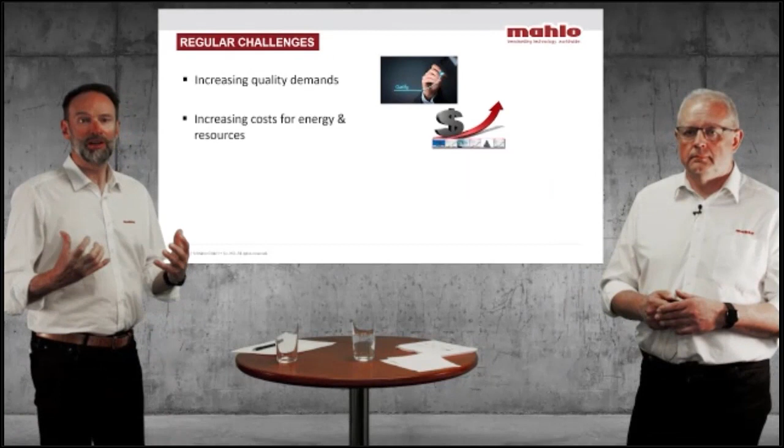Yeah, but no matter if we're talking about textiles or the other industries, we all have the same challenges, and this is the quality. Quality is rising, money is always going down. We have to make the best out of it. We really have to get the best efficiency out of it. Nothing goes for free, but we have to provide the best quality.

These are the challenges you are faced with every day, because at the moment, after these unthinkable happenings in Ukraine, for example, and the energy crisis which we all face, also for the future, we are sure that the prices for energy and resources will only know one way, and this is upwards. This is also creating inflation everywhere. In most countries, because of the energy prices, you have a high inflation rate. This means the salaries also have to go up in order to still be able to buy food and do the necessary things.

And at the same time, because there has to be a transition in the world's energy sector and so on, everybody is talking at the moment about sustainability, and this is especially for textile companies an important factor which comes up more and more. Everybody wants to be green, and very much so. It's not just that we see it everywhere. We are in the focus.

The textile industry is always in the focus of the media because of the pollution, because of the high energy consumption and so on. And this is also something that we have to focus on ourselves, because we can save a lot of money, but also because we do have a responsibility towards the next generation, and we have to take that seriously. And exactly this is what we want to discuss over the next 45 minutes to one hour with you. This is your path to sustainability, because we believe that there is no excuse to waste any money. No.

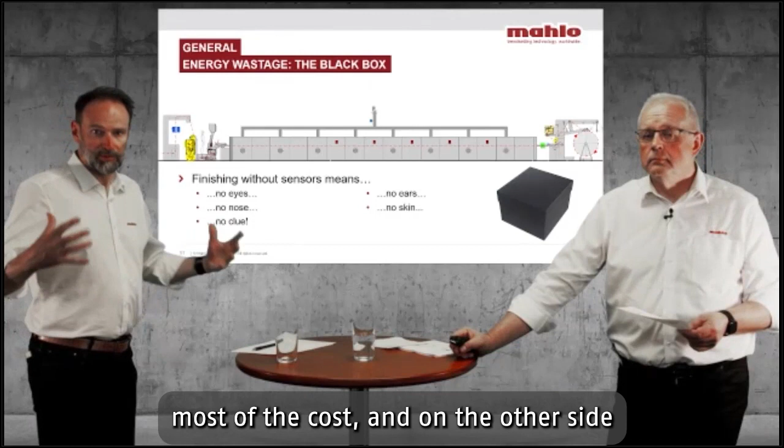And in general, we are focusing on the drying machines here, because those drying machines, first of all, are consuming most of the energy, most of the cost, and on the other side, they are also the bottleneck for the entire production. So they are very, very important for every wet finishing.

And without any sensors, you don't have any eyes, no nose, no sensors. It's like a black box, and we want to open that black box for you to look inside and to make those processes which are happening inside more efficient and more transparent to you.

Yeah, when we want to talk about energy savings, we first have to talk about what energy is, for example, going into such a stenter frame over the years. And we have made our calculation here based on 240 days. We have a woven fabric, 150 grams heavy, 1.6 meters wide, the squeezing effect 75% desired. The 75% is not very low. Yeah, exactly. So we believe that this can be run with 60 meters per minute.

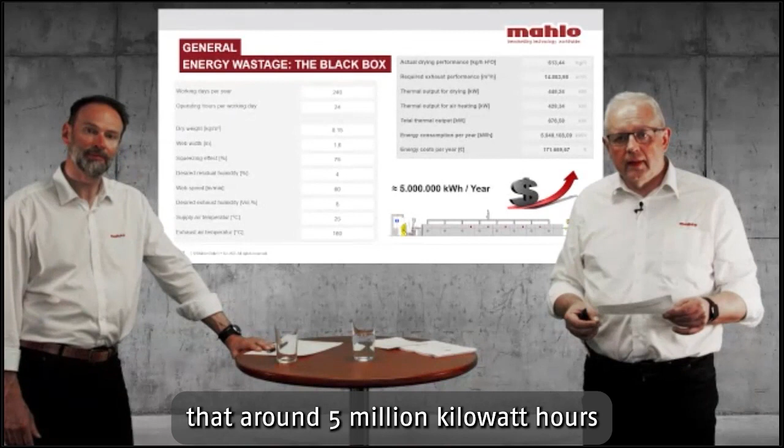Then when you calculate how much moisture is running into this dryer, you can easily calculate how much energy is necessary to evaporate all this water which this kind of fabric is bringing into the machine. And then we come to the conclusion that around 5 million kilowatt hours per year are used inside such a stenter. For sure, this will also depend on the product mix and how it is operated, but this is a value which you have per year.

We did indicate the kilowatt hours here because it is very difficult at the moment. The energy prices, we know they go up, but they are still very different, and we think you will have your own values and you can calculate by yourself how much money this is. Exactly. Those tables you can find on our website under ROI calculator, and then you can punch in your individual numbers and see how it works for you.

Okay, so if we just give you a number, in Germany at the moment we calculate with 9 cents per kilowatt hour for the industry. This will then come to 450,000 euros per year. If you calculate over the next 15-20 years with a certain inflation rate and cost increase, then you can imagine how much energy such a stenter frame is actually requiring through its lifetime. And accordingly, the savings that you can make by optimizing those things are really immense.

And yeah, if you want to save money, you don't just look at the energy. There's also the time, there's the energy, the electricity, and that, of course, all sums up in saving money. And this is called the Mahlo process control.

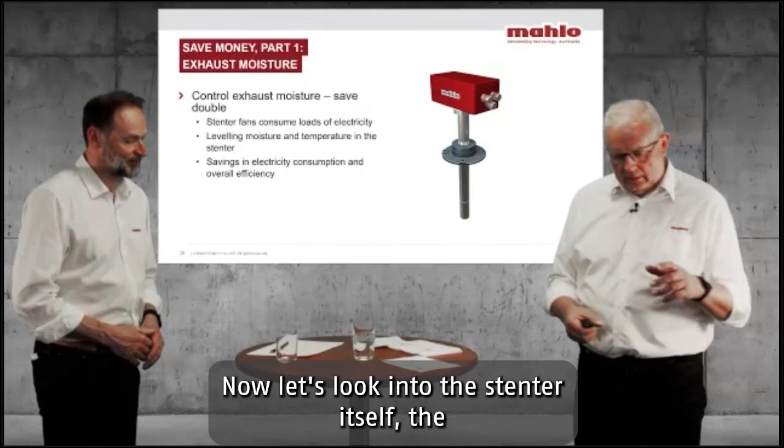Now let's look into the stenter itself. The best possibility to save energy in the first place is to check how much air is thrown out via the exhaust duct on the stenter frame.

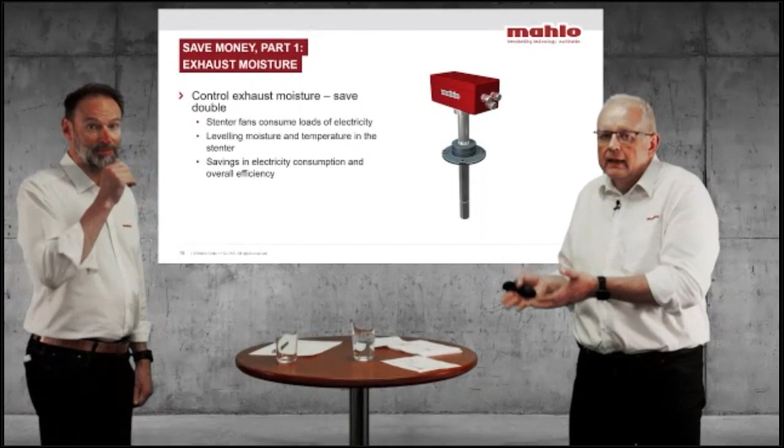Because inside the stenter frame you evaporate the water, it has to be removed. This is done via the exhaust fan and the exhaust duct. But very often, people throw dry air out of the dryer, which could still carry much more moisture without influencing the drying process. And this air is hot air, warm air, full of energy, and the energy is better used inside than outside of the stenter.

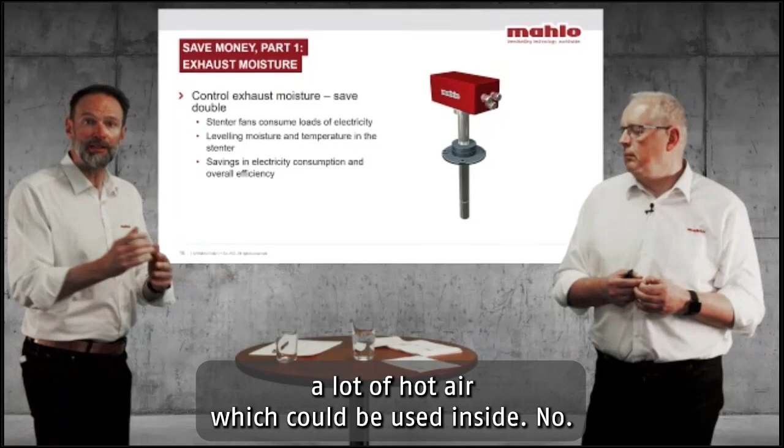And by putting that air out, you are not just losing a lot of hot air which could be used inside. You also use those fans, with 7.5 kilowatt motors, blowers, running on full throttle and really wasting your electricity, while they are putting that hot air outside that you would need inside. So you save twice if you optimize that process.

And therefore, we recommend to put the sensor measuring the exhaust humidity into the exhaust duct. This is our ZS12. It is a zirconium oxide based sensor with which we can measure how much moisture is in the exhaust air. When we know this, we can set a target value which is good for the drying process without influencing the drying process itself. And automatically, the system controls the speed of the exhaust fan, so that only the amount of air that is actually necessary is thrown out via the exhaust duct.

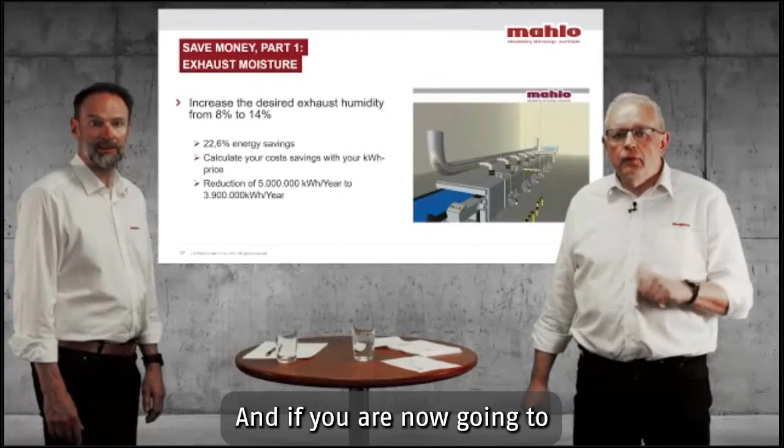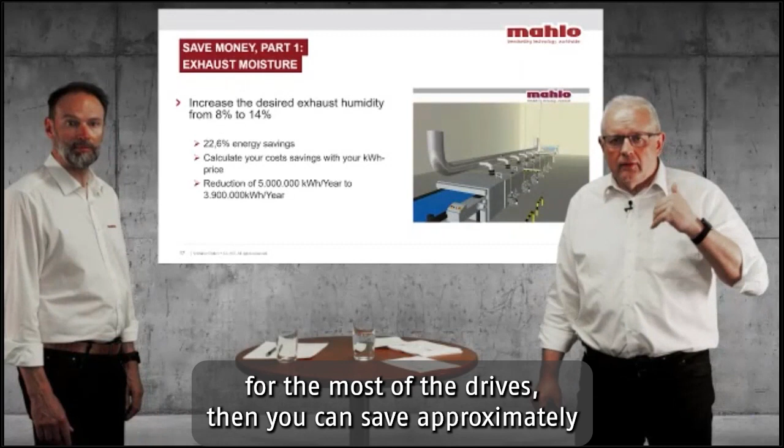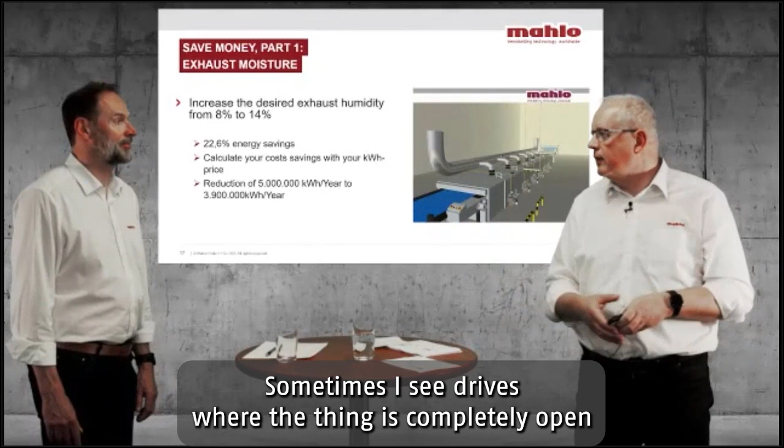And if you now increase, for example, the exhaust humidity from 8%, which means the air is nearly dry, to 14%, which is a regular good value for most dryers, then you can save approximately 22% of energy. Mm-hmm. And the 8%, this is still on the higher side. Sometimes I see dryers where the thing is completely open and all the energy is going out.

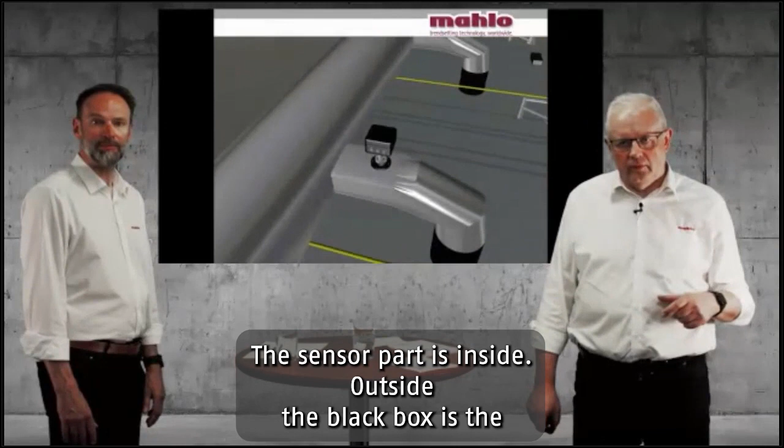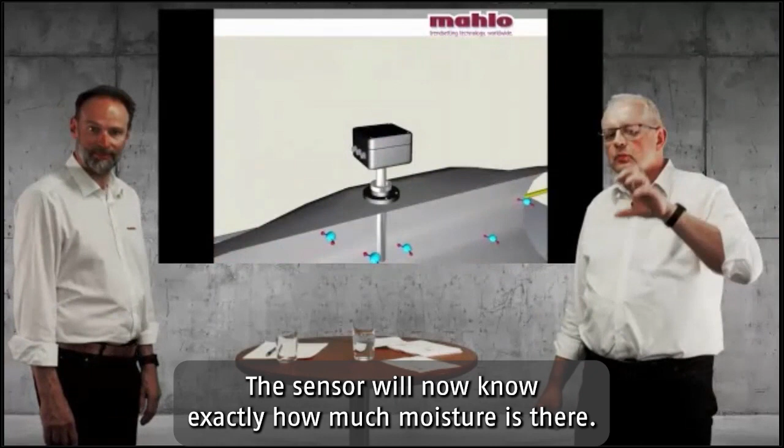But let's go and look inside the stenter and follow the path a little bit. So you see the sensor now. It's in the exhaust duct. The sensor part is inside; outside, the black box is the electronics. Here you can see the sensor again. And now, when it has finally stopped rotating, we can see the moisture going into the exhaust duct. It is passing by the sensor. The sensor will now know exactly how much moisture is there, and this will be indicated. And as I mentioned before, with this information, we control the exhaust fan.

Yeah. And if we take this example, you bring down the energy consumption on such a stenter frame from 5 million kilowatt hours to 3.9 million kilowatt hours, which means 22% of energy savings. If you multiply this with your energy cost, you have your savings. And the return on investment period is very, very low, so you get the investment back very soon if you invest in this little piece of equipment.

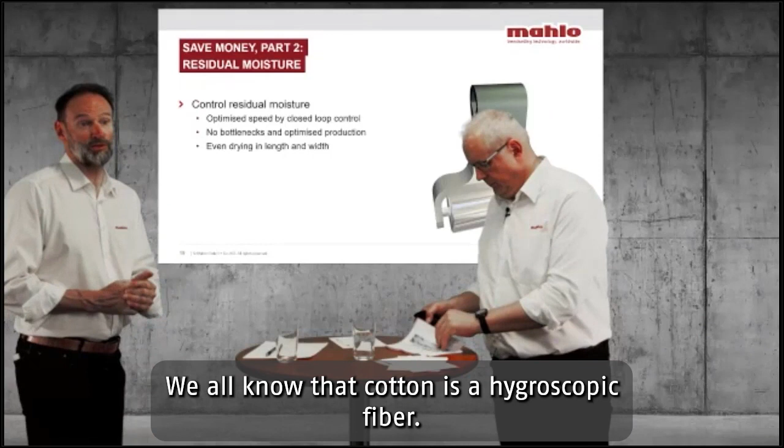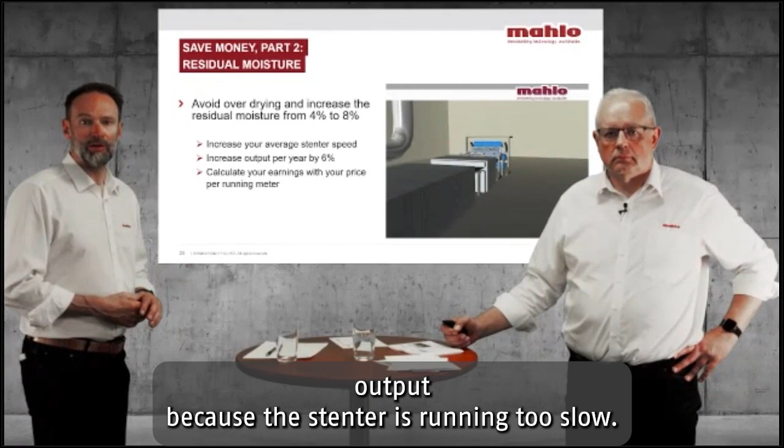Okay, something that everybody knows, I think this is also where Mr. Mahlo started, is the residual moisture. We all know that cotton is a hygroscopic fiber. Hygroscopic means that it pulls the moisture from the surface into the fiber, which means if you over dry a fabric, after a couple of hours you will have back moisture of more or less 8% in the cotton fiber. With that being said, over drying is not helping anything. It just wastes a lot of energy and ruins your overall output, because the stenter is running too slow, you're wasting too much energy, and the fabric gets back the moisture anyway.

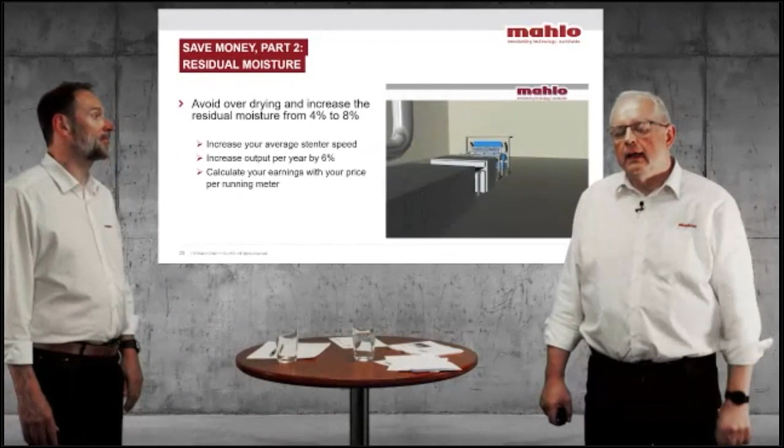So you have to avoid over drying to increase the speed of your stenter and get more production out of it. And by doing so, you are not only getting a higher production, you also have a much better absorbency and a better quality of the fabric at the end of the day. Yeah, and because you can get more output from the stenter frame, you reduce this bottleneck in your production, because you can run the stenter frame with the highest possible efficiency, and you have, like Stefan said, a very even moisture content at the outlet, which is good for the following processes.

Also here we have a short movie where you can see the electrodes where they are installed.

Most of you have seen this, because this is not only on stenters; you also find this on cylinder dryers, you find it on weaving preparation machines, wherever moisture content, residual moisture content, needs to be measured. This can help to optimize the process there.

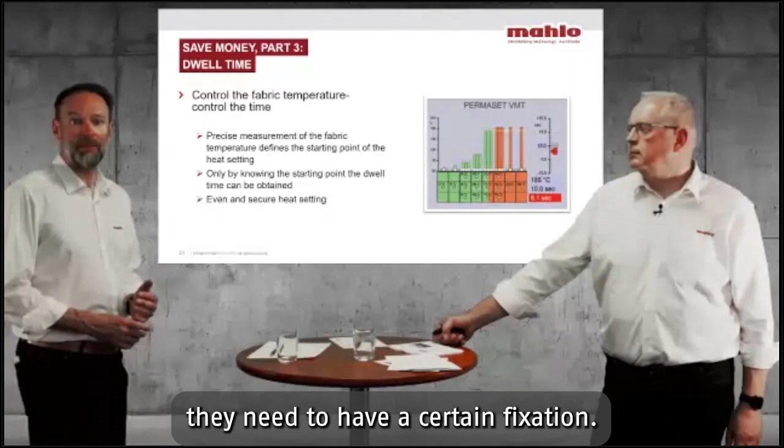Now let's come to part number 3, and this is the dwell time. If we talk about man-made fibers, of course, they need to have a certain fixation, and this fixation is a clearly defined time period at a clearly defined temperature level. And for having a certain time in the stenter, you absolutely have to know where it starts. Otherwise, you cannot say when it stops.

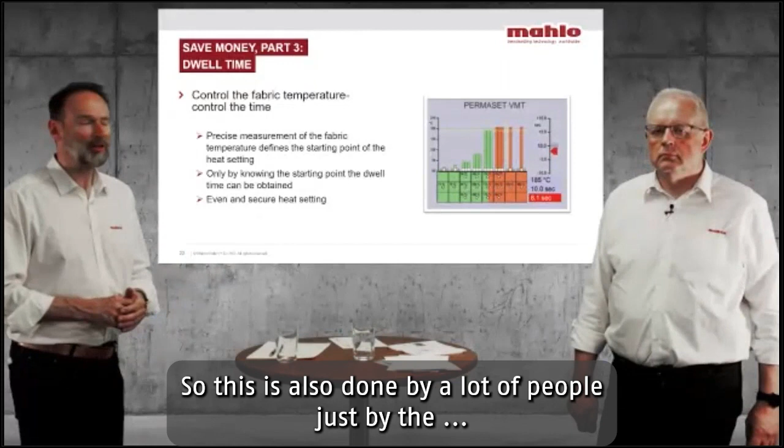So this is also done by a lot of people just because you do it all the time like this, you know. Exactly. Very often I go there, ask customers, and they tell me, well, we run this with 25 meters because we always run it with 25 meters.

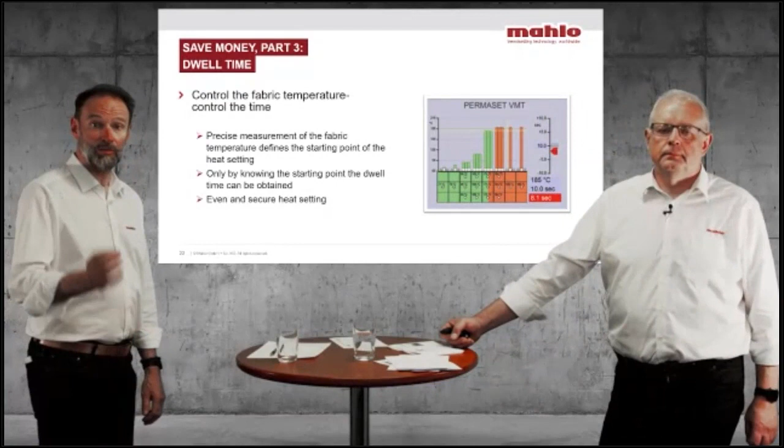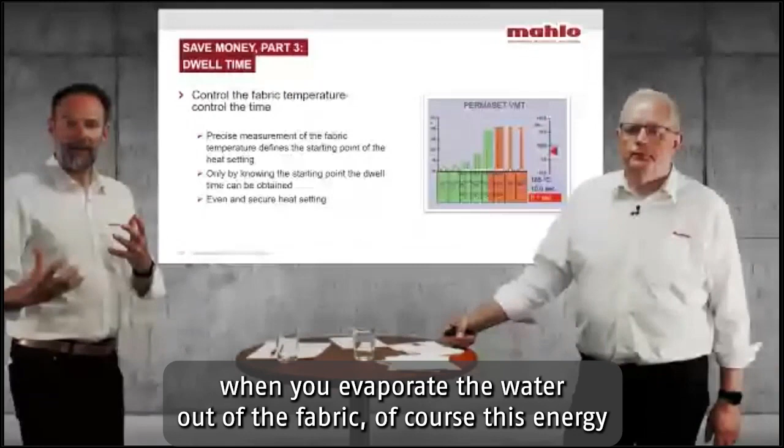And here we have a sensor which is measuring the temperature of the surface of the fabric. It is not measuring the temperature of the chamber. It is really going on the surface of the fabric, simply because at the beginning, when you evaporate the water out of the fabric, this energy is used to get out the moisture. It is not used to heat up the fabric. Only once that moisture is gone does the fabric start to heat up.

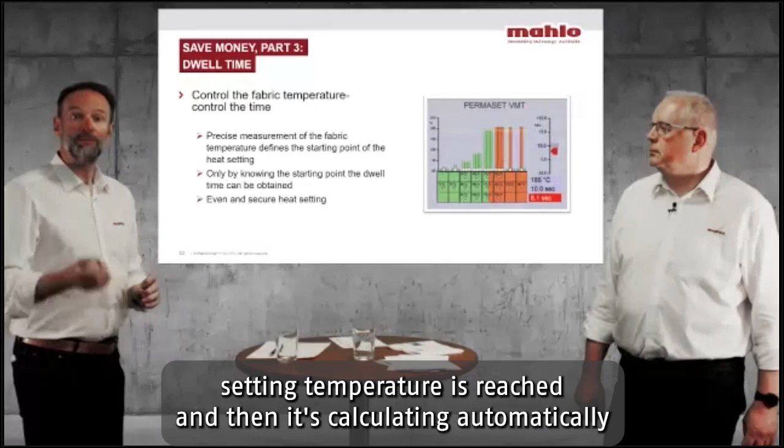This is how you see it there on the red columns. Those red columns indicate the point when the heat setting temperature is reached. And then it calculates automatically the time until the heat setting is finished. So you always have exactly the right speed for that process as well. And again, here you optimize the speed of your stenter, you optimize the production of your entire wet finishing.

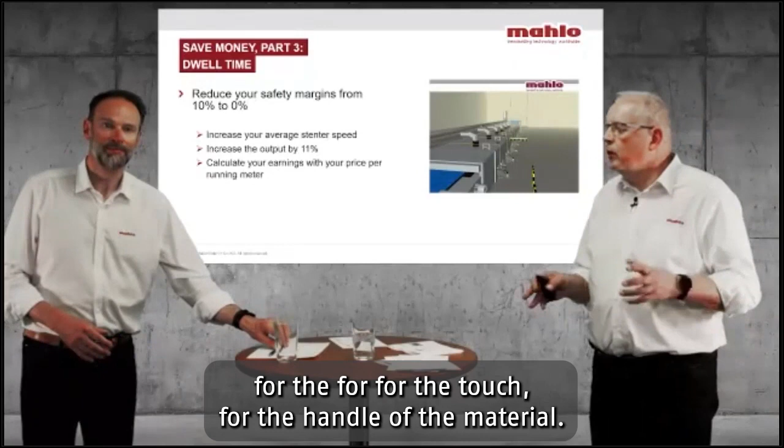And you just have to enter the desired dwell time, which you for sure will know, and off you go. Then the full control is done. With this, you can avoid any safety margins. A lot of people run their stenter frame with high safety margins. They do not run it as fast as would be possible because they want to be on the safe side. But being on the safe side sometimes is also not very good for the touch, for the handle of the material.

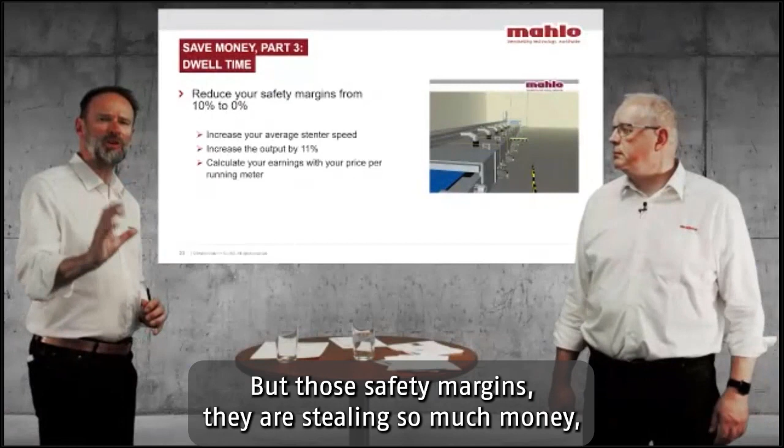Let me tell you something about safety margins in general. Those safety margins are the biggest enemy in your production, simply because they have such a friendly touch. You think, okay, I'm running a little bit too slow, so nobody's going to blame me. But those safety margins are stealing so much money without you even knowing it. It's perhaps instead of 60 meters, you run 55 meters a minute. Yes, but it's 10% less production out of the entire wet finishing.

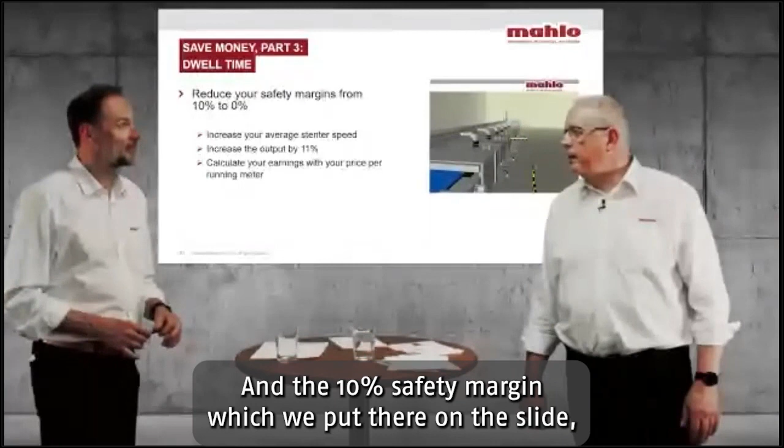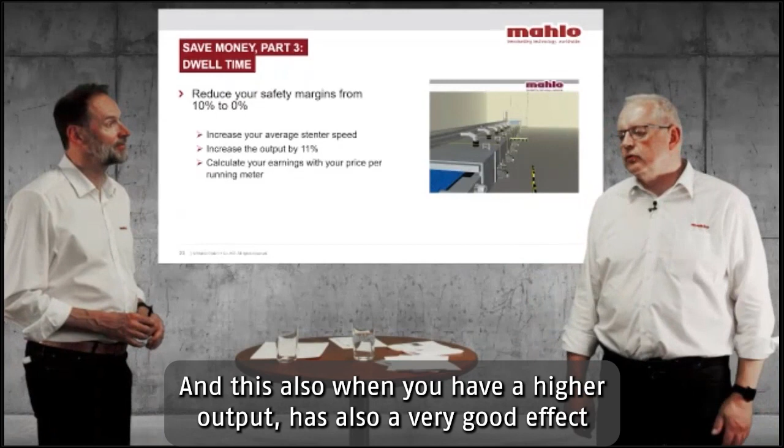And this, ladies and gentlemen, is a huge number. This is something that you really cannot leave unconsidered. And the 10% safety margin which we put on the slide is really on the low end. I have seen many cases where we could go up with the speeds by about 20–25%. This is possible, and then you get quite a good output. A higher output also has a very good effect on the energy cost per running meter.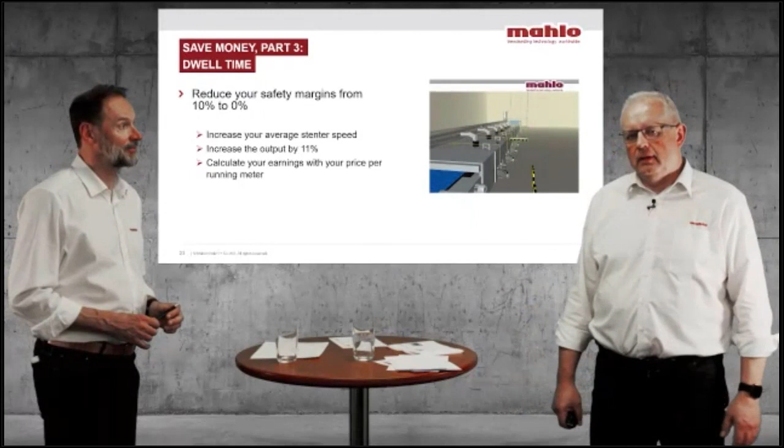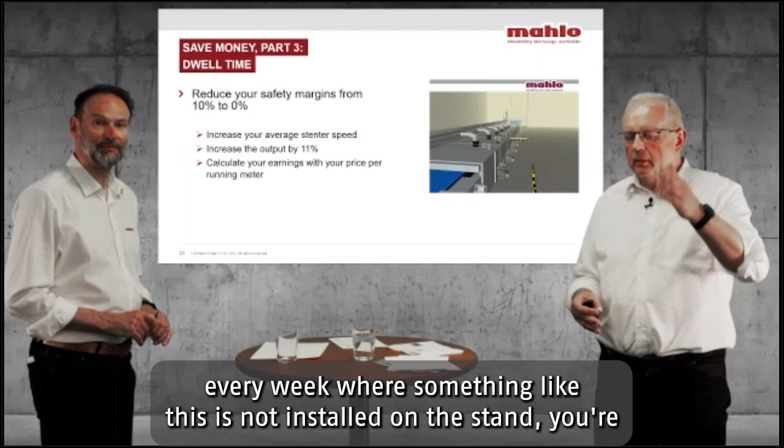In the end, as we said before, there is no excuse not to do this, wherever heat setting is going on. And sometimes I don't understand people when they say, let's wait, because there are some costs involved to install such a system, because in the end, every week where something like this is not installed on the stenter, you're losing money.

Yeah, that's now the next. Yeah, let's interrupt quickly.

I mean, we've talked about energy savings now for a long time. I would be very curious about the situation in your production. Do you have anybody who is responsible for the energy saving, something like an energy saving officer, an ESO in your company? Do you know something like that? So please give us a yes or give us a no.

Yeah, we just started this inquiry. So very simple question. Do you have such an energy saving officer, yes or no? Well, I think that we can already see the results. To my surprise, 56% of our participants say yes, there is such an energy officer in their company, and 44% says no. So what about you? Does this reflect also your experience, or are you surprised by these numbers?

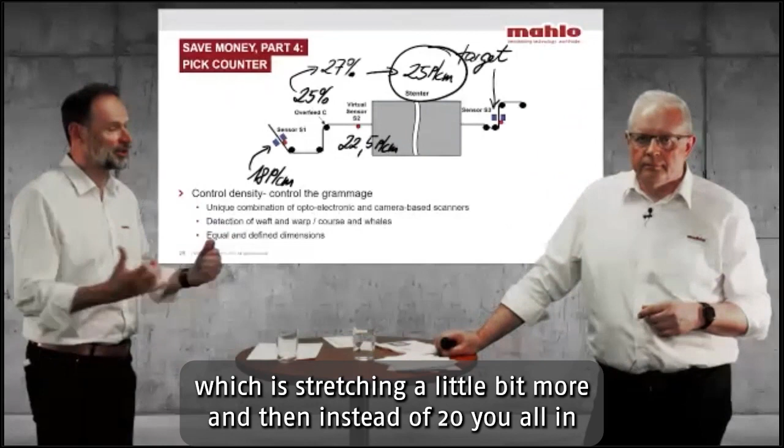And normally this is all running quite fine if we assume that the initial linear density is always staying the same. But exactly, this is what you mentioned before. It is not always the same. Sometimes we have an entanglement, sometimes we have a different machine which is stretching a little bit more, and then instead of 20, you all of a sudden have just 18.

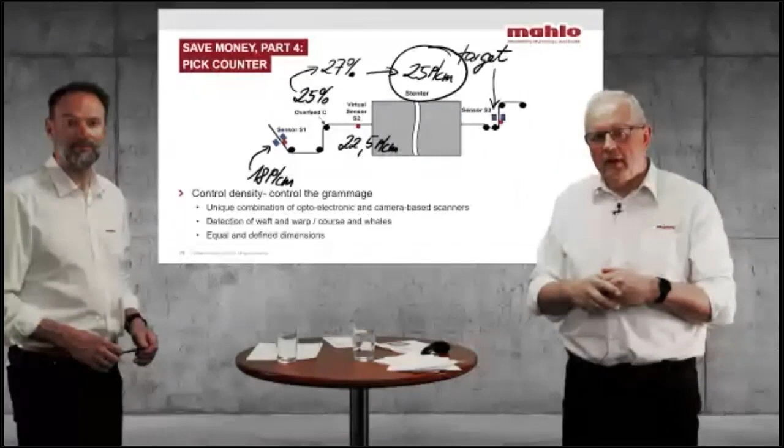When you now measure with our sensor at the entrance of the stenter frame, let's say you have 18 picks or courses per centimeter, and you run the stenter frame constantly with 25% overfeed, you can calculate yourself that you will not end up with 25 picks or courses per centimeter, what you want, but something different. And this is exactly then our task, because we will send out controls to the overfeeding system of the stenter frame and increase the overfeed to 27% until we have again this 25 courses per centimeter or picks per centimeter.

With this kind of control, this intelligent feed-forward control, we have the possibility already at the entrance of the stenter frame to ensure that what goes in is completely equal. So long story cut short, if you have a pick counter from Mahlo, you really have peace of mind that you always have the right density of your fabric, no matter what happened with it before.

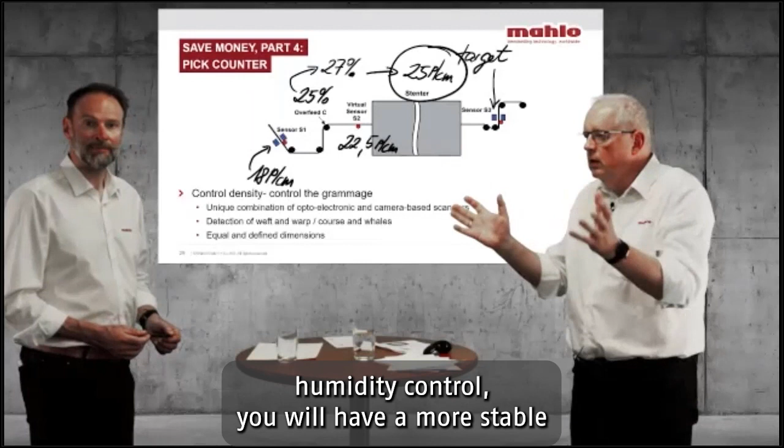And this helps inside the dryer again when you have a heat setting and material coming in with a constant density, constant weight. You will not have to do a lot of control up and down. The same for the residual moisture, it helps for that too. Even for the exhaust humidity control, you will have a more stable output and also drying process inside the stenter frame.

And therefore, we put this pick counter also in there because from our point of view it's very important, especially when we talk about sustainability and saving costs. We believe this is a big possibility, and I have to say, over the last 10 years we have sold more than 1,800 of those systems to the industry, and most of them were retrofitted.

But this is not the only advantage you have with such a tool. Density and weight go side by side, and we all know that knitted goods are sold by weight. So the weight plays a major role, and we now have the ability with our camera-based sensors at the exit to also get an indication about the weight directly after the stenter without putting samples to the lab.

Now I can only recommend all the companies today online who are active in the knitting industry to look into this matter, because this makes a difference. It really does. Okay, so coming to another one: cylinder dryer.

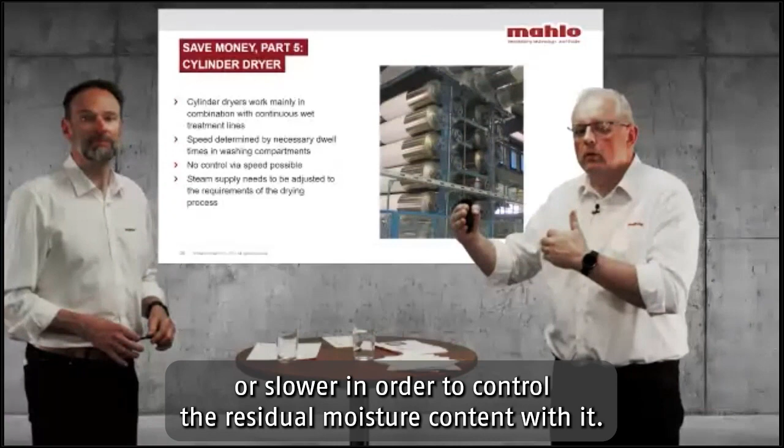So it's very important to know that those machines, unlike a stenter frame, cannot run faster or slower to control the residual moisture content. What you can do here, the only choice you have, is to control the input of steam into the cylinders of the dryer, in particular if you have a very light fabric running over the entire stacks. And this is what we do: we have the ability to switch on and switch off different stacks or even different cylinders to optimize the steam consumption for two reasons.

First of all, steam consumption, of course, is energy, it's money. But on the other side, and this is even more important, you need good absorbency afterwards, because if you have a fluctuation in the drying process, you have a difference in the absorbency. If you imagine you have an over-dried fabric at one stage with perhaps 2% or 4% residual moisture, and then again you have 8%, that is already a delta of 50%. Then at the next step, the next process, where you perhaps have chemicals added in a padder, a lot of chemicals are used at that step just because you had a problem with the cylinder dryer.

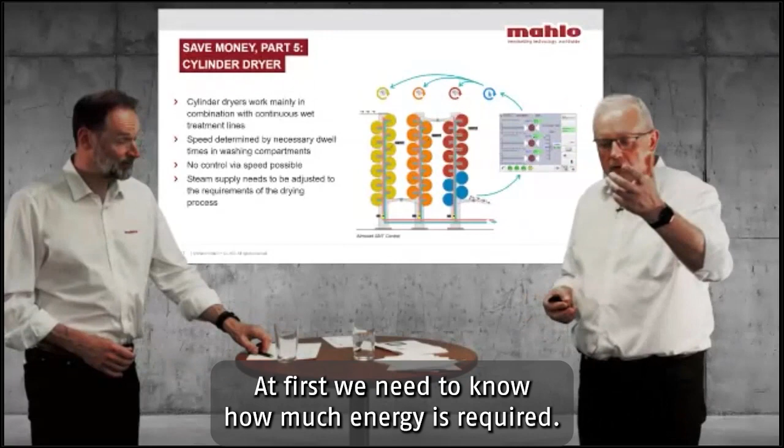And now a few words about our system. How does it control the steam supply into the individual cylinders? At first, we need to know how much energy is required. How can we get this information?

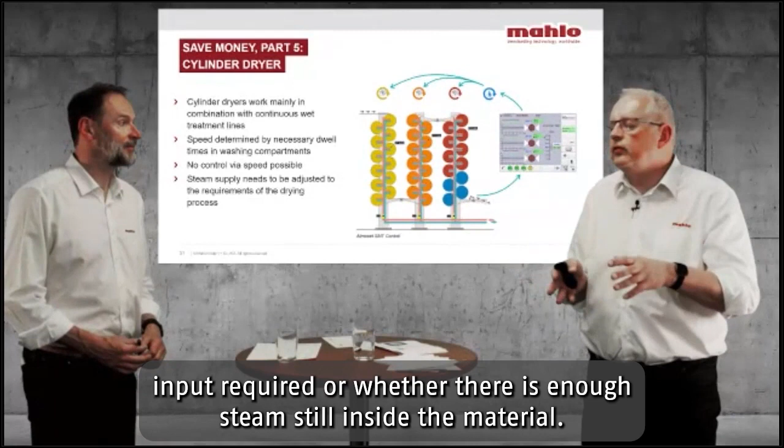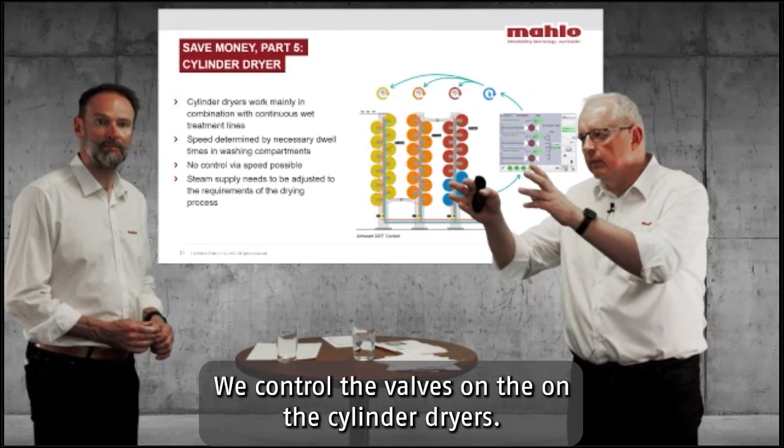We have decided for ourselves that we are measuring the temperature of the condensate at the outlet of the dryers, because with the condensate temperature, you know exactly whether there is steam input required or whether there is enough steam still inside the material. So if, for example, you're running a lighter weight fabric and a heavier weight fabric comes onto the first stack, immediately you will see that the condensate temperature will drop down. And this is then the moment where we control the valves on the cylinder dryers, and with this we keep the condensate temperature always stable.

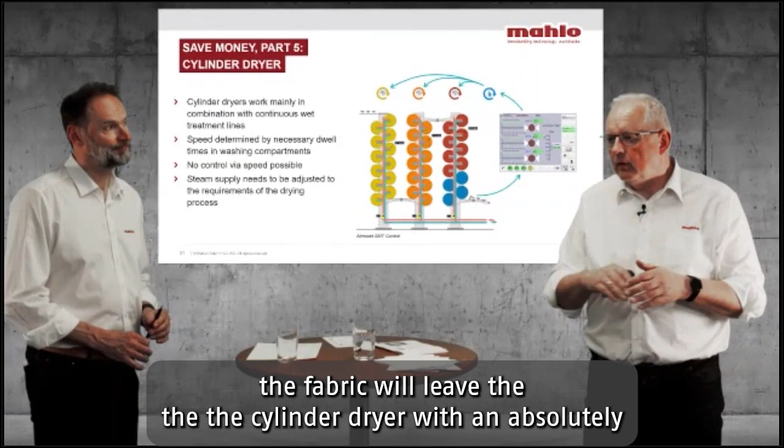At the end of the dryer, we additionally have a residual moisture sensor, and with this moisture sensor we will bring the absolute flat line to the right level. So whether we require now 6%, 8%, or 10%, depending on the fiber type and the process afterwards. But with this kind of system, we can ensure that at the end, the fabric will leave the cylinder dryer with an absolutely homogeneous moisture content in the length direction.

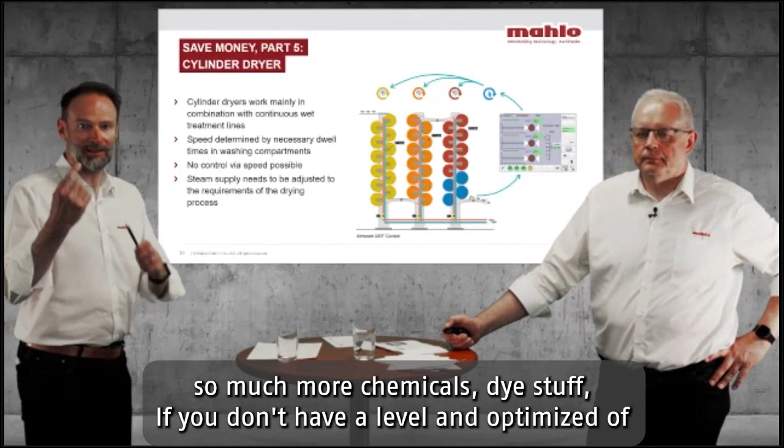So listing tailings in following dyeing processes will be much reduced, and this is also what a lot of our customers told us. Energy saving is very interesting for them, but on the other hand, also the improved quality within the following processes. Every padding which is coming afterwards is really consuming so much more chemicals, dye stuff, if you don't have a level and optimized residual moisture at the cylinder dryers, and this is costing much more money than the steam, because this is really highly concentrated chemicals, this is really dye stuff which is paying a lot of money, and therefore this process really has to be controlled, not simply because of the steam.

This is going, we are talking about 36% which can be saved here, but the following costs, they really count, and that also has to be looked after.

Here you have a few impressions how the systems look when they are installed. I don't think, because of time reasons, that we have to go through all this.

And here is a summary of what we in the end already mentioned. One important thing is there, we have this one value, up to 36% savings of steam input into the energy savings. And these are values which are not from us. These are values from our customers who had noted and stored the data about the steam input into the system before and after the installation.

For sure, there are others, it depends always a little bit on the product mix, how much you can save. But it was up to 36% on several qualities. And this is not values from us. They have a time calculation before Atmoset and after Atmoset, and the after Atmoset is normally 36% less steam than before. And the other points on this slide, I think we have mentioned already when we explained the system.

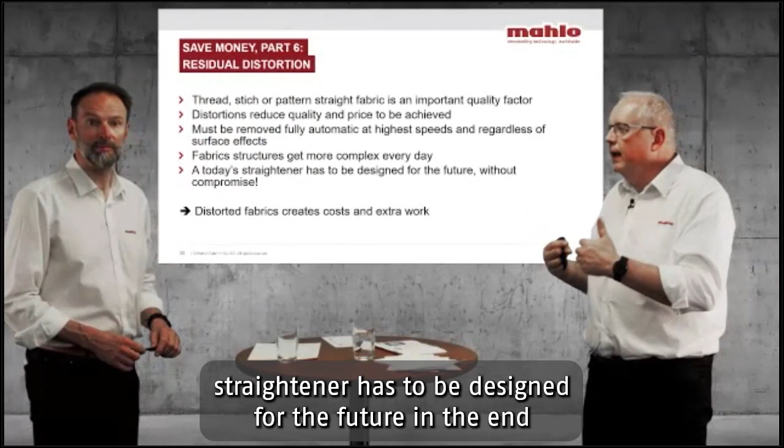Exactly. And also, when we talk about weft straightening machines, we believe that a weft straightener does not have to be designed only for the products you have at the moment, because we are in a fashion business, and therefore I believe a weft straightener has to be designed for the future in the end, so that you are safe on this. And because also in the future, you need to avoid these costs with reprocessing.

We talked with our customers and we said, what do they sometimes do? What are they doing when they have this kind of problem, when they realize there are some distortions?

Some of them, and this is the majority, say they will run it a second time through the stenter frame, because they have to dip it, wet it to get it corrected, and then go through the stenter frame again. It's a waste of money.

Another possibility would be to accept a lower price for a big portion of the material, say a B quality, or what we've mentioned as a total loss. This means you cut out the areas where you have these distortions, and in the end the costs come from all this reprocessing.

One of the big advantages of Mahlo is that we have a very wide range of different units, so we can adapt our model totally according to your needs. And this starts with the sensors. You tell us your product mix.

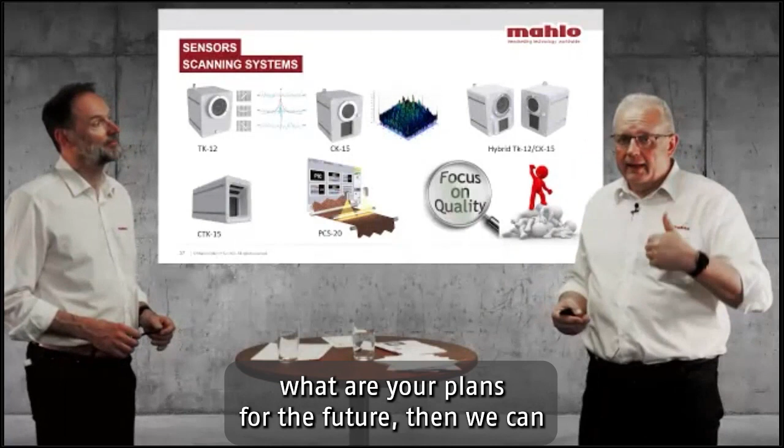This is something we always need to discuss with our clients. We need to understand what they want to do with such a machine. Once we understand this, and know what your product mix is and what your plans are for the future, we can use our quite big portfolio of different measurement principles to select exactly the ones which fit your needs. We do not have to do everything with a camera, or with an optoelectronic scanner. We have quite a wide range.

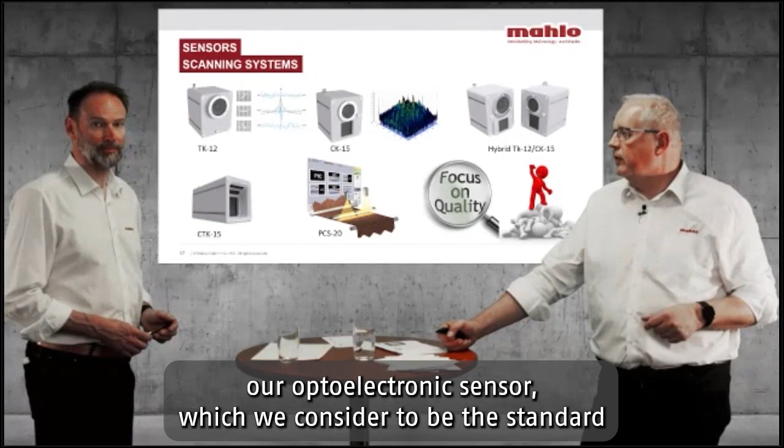What we see here, on the left side, is the TK12. This is our optoelectronic sensor, which we consider to be the standard in straightening for the majority of products. Then we have our CK15, a camera-based image scanner, available with reflected light, transmitted light, and infrared light for special qualities.

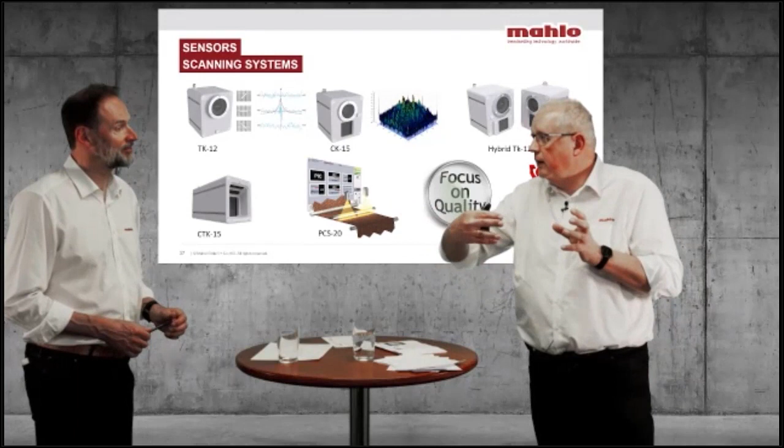Then the two sensors can form together a complete new system, which we call a hybrid system. With this, you can use one sensor to check the fabric from one side and the other sensor from the other side, giving you all possibilities.

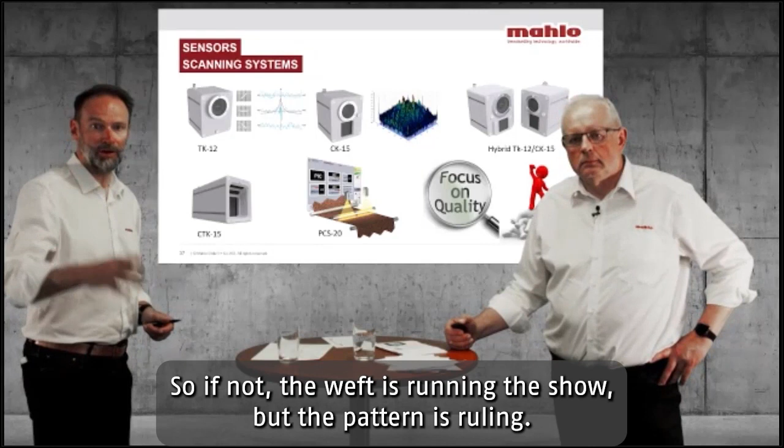Finally, we also have the line scanning for the pattern control system, where we scan the surface of the fabric like on a Xerox to detect the pattern. So if it's not the weft running the show, but the pattern is ruling, then this PCS line scan camera is the best solution.

A typical application would be lace fabric, where you don't have a weft or a course line going from one side to the other. You also use it in shoe production or for airbags in technical textiles. So there are a lot of different things that can be counted.

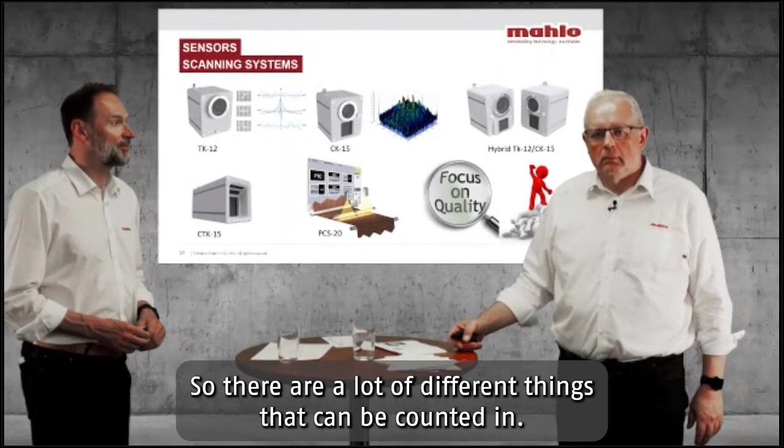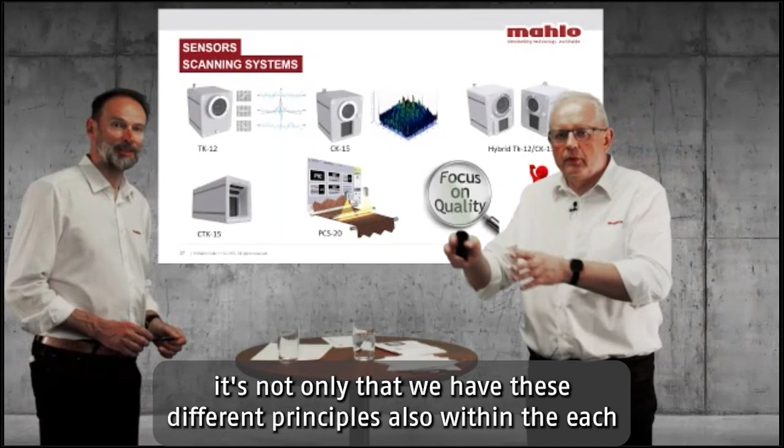We have one more sensor, the CTK15, used when we have very rough structures, like in the carpet industry with tufted or woven carpets, or at very slow speeds. This camera type is also very useful. As mentioned before, it's not only that we have different principles, but also within each principle we have different executions of our sensors, with which we can adapt directly to your needs.

Could we move a little faster, because I think there are still a lot of different things ahead of us. Now this we can maybe skip.

What is also quite important is to understand that we have a very unfriendly situation at the dye houses. There's a lot of dust, a lot of dirt, a lot of fluff. It's a hostile environment, and therefore any traversing movement of the sensors doesn't really play into the cards of production.

How is it looking in your production? Can you tell us about the situation? We don't collect the names, but if you could just give us an indication whether it's more like a hospital, a little bit dirty, or really toxic. Just give us your vote right now.

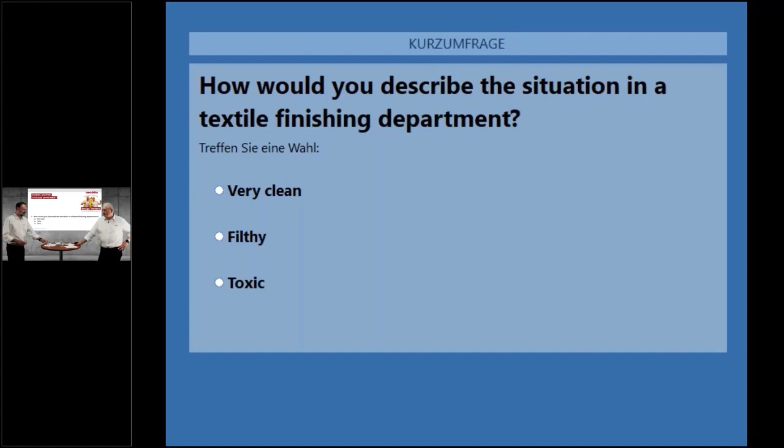I can see the results. So 25% of participants describe the situation in the finishing department as very clean. 67% say it's filthy, and only 8% say it's toxic. So what about your experience?

Good, but that shows we really have to take all possible precautions to make sure a sensor doesn't get stuck somewhere and stop giving information. The Mahlo system always has at least 4 sensors sitting side by side, up to 8 sensors, constantly scanning every single point of the fabric, and even if one sensor isn't working, the others compensate for that. So we have a very safe operation here, and this is important because the sensor is the eyes.

Without the eyes, we could not see, and without seeing, we cannot control. And this is why we don't take any chance here by any moving part. We just make sure that we get the required information absolutely sure.

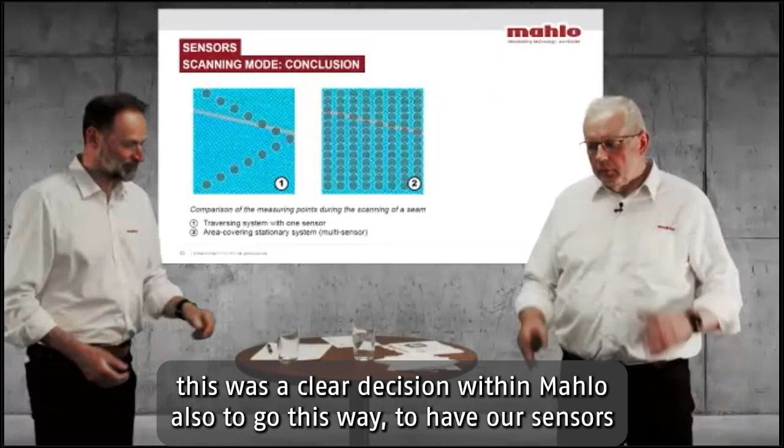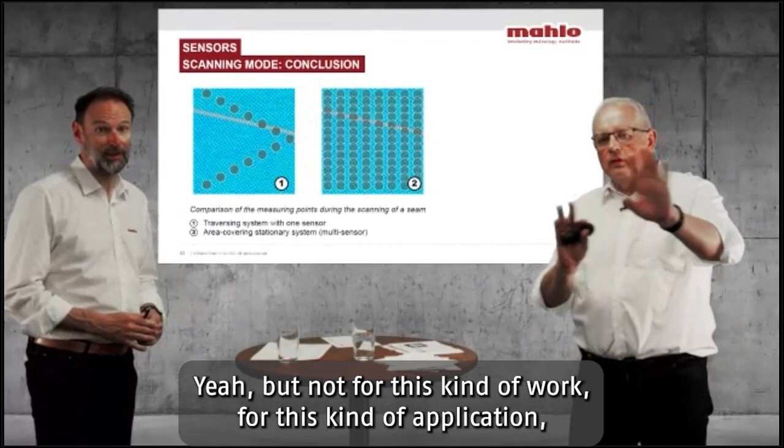Okay, yes, and this was a clear decision within Mahlo also to go this way, to have our sensors at different positions in cross direction, because then every millisecond we get new values. This is constantly renewed. We could let the one sensor travel, but not for this kind of application. For this kind of application, a fixed, multiple scanning system is much better, because you have this instantly, immediately there.

If you would have one sensor and it's traversing in cross direction, as you can see on the left side, it takes too long before you actually can react. If there is a bad sewing coming through, you have even more difficulty to get this whole thing sorted. Therefore, it was a clear decision from Mahlo to go this way, because it's simply the best.

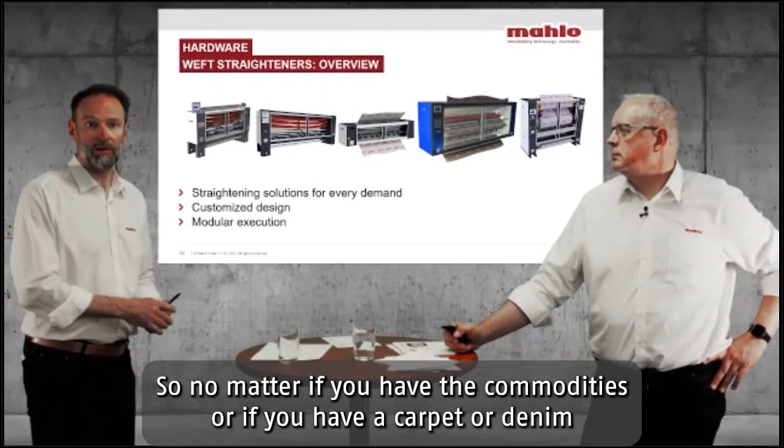Okay, let's go to the hardware. Same situation as we have it with the sensors, we also have it with the machines. We have something for everybody. So no matter if you have commodities, or carpet or denim, or lightweight fabrics, or even some things that cannot be detected, we still can straighten it. We can straighten doglegs, we can straighten S distortions. So you tell us what your problem is, and we provide the solution.

Since we do not have so much time, we will not introduce each of those machines now. We will have them on our booth at the ITMA in Milan. So please come by, talk with us about your application, and then we can recommend whatever is possible.

But one thing, because this is a really completely new development at Mahlo, I want to highlight now, because we consider this the absolute Champions League of weft straightening. It is a specialist for knitted fabrics, for knits, and you are the first to see it. Actually, this is the first time that we put it in public. It will be on display at the ITMA for the first time ever.

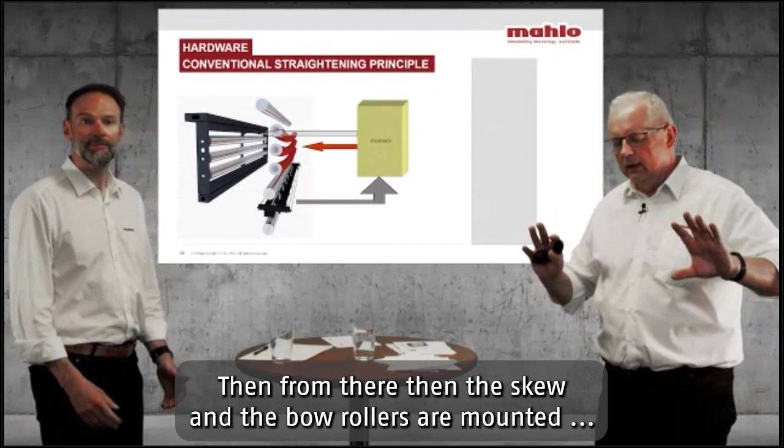This is a combination of different straightening principles, making sure that really every single millimeter comes out totally straight. With the normal weft straightener, which I hope most of you have seen, especially the Mahlo system, we always have the scanning system at the exit end. It detects the distortion there and gives it to our electronics, and from there the skew and bow rollers are moved to certain positions in order to shorten and lengthen the fabric path to correct the value.

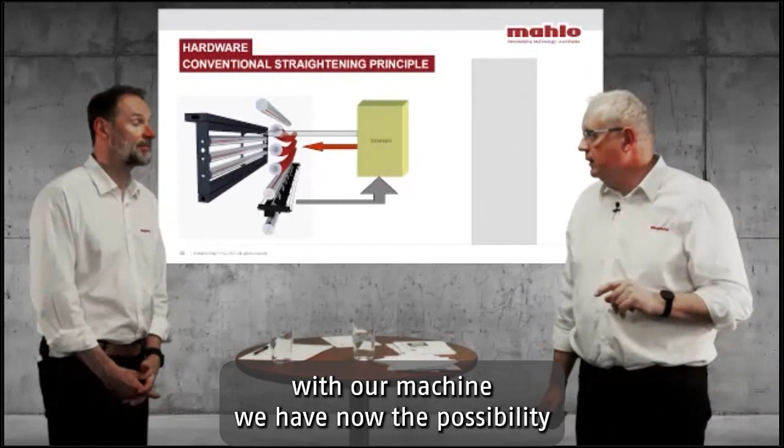But you need to have it at the end because you need a control loop. You cannot just put it on top of the machine, and therefore you always need it at the end. But with our new machine, what we call the Orthopac RXVMC, we now have the possibility to have two parts. We have one straightener.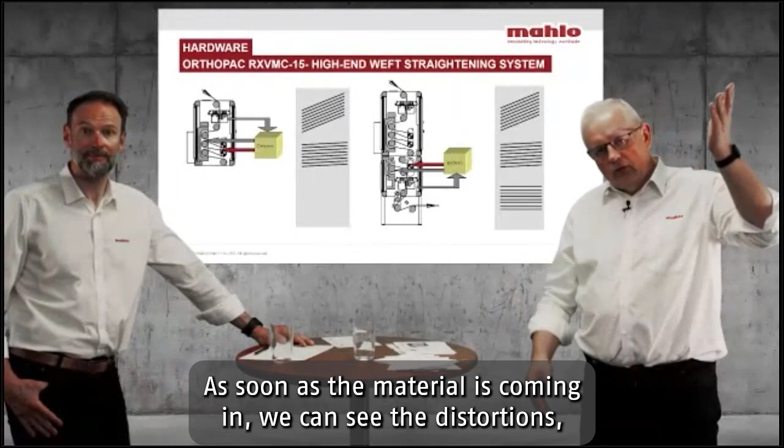On the left side, you can see it. It has the detection system at the entrance. As soon as the material is coming in, we can see the distortions, and based on the distortion we see, we can immediately start from the first centimeter of the fabric arriving, or of the new distortion. We can move the skew rollers and react on this. For sure, this is not a controlled loop.

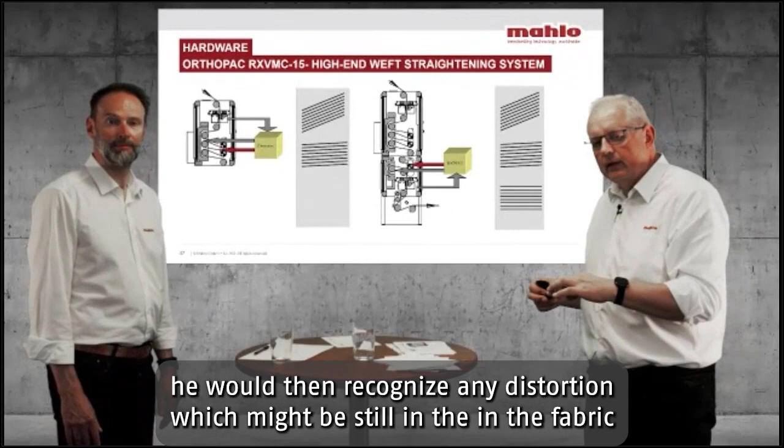Therefore, on the other side we have a second part of the weft straightener, and there you can see there is also a skew and a bow roller and a detection system at the end. This fine-tuning straightener afterwards will recognize any distortion which might still be in the fabric and give a signal via the electronic systems to the skew and bow roller, and then you can be sure that the fabric is completely straightened right from the beginning. It's actually two weft straighteners in one.

For sure, also this machine is equipped with our hydraulic system to move the skew and the bow rollers to the right positions. This is a very excellent system, and it's working in a linear system because the piston is moving the skew rollers directly there. The momentum is unmatched. There is no way that any other system can create that momentum as a hydraulic system. You use hydraulic systems also with the caterpillars or with cranes or with the heavy duty operations, and this is why this momentum here is really without any competition.

We also let our customer then the choice for an electric system, but also there we have optimized the whole kinematic of this drive so that the characteristics of our electric drive system is very close to a hydraulic. It's not as good as the hydraulic, but it's close. It's much better than if you have just toothed bars, because then you always have some play involved. Here, with our system, there is no play involved. And a weft straightener has constantly to move forward, backwards, has to do a constant job.

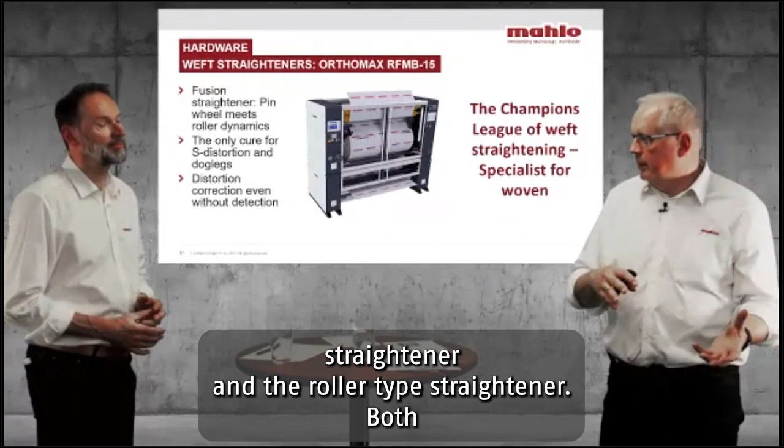Okay, and now we have here another system, and this is what we call our champion for the woven fabric. This is, in the end, as you can see here, a fusion of a pinwheel straightener with a roller type straightener. Both principles of correcting distortions, pinwheel and roller type, have certain disadvantages, but if you bring them together, they only have advantages, and this is what we have done on this machine.

Also, because of time restrictions, we cannot explain everything which is now included, but we have this machine on the booth. We can show you this. You can see it in running condition. So please come by, and I think we then will be able to convince you. We are here as well.

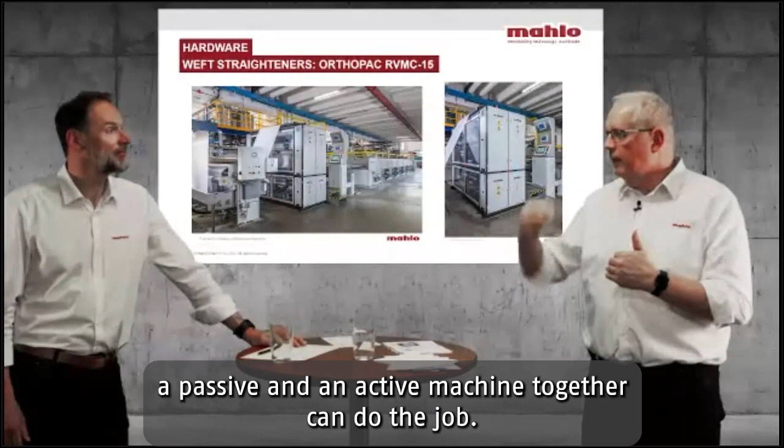Okay, here you can see some installations. It's a quite huge machine, I have to say, for a weft straightener, but it's also creating results, especially on woven fabrics where you have irregular distortions, where all the roller type straighteners have their issues, or if you have just at the edges some distortions. This machine, with the pinwheel and the roller type straightener, a passive and an active machine together, can still do the job.

Okay. When we talk about machines, we also have to talk about operating them, because a machine is only as good as the operator which is standing at the machine. And our operating concepts, they are very intuitive. We have spoken to a lot of operators, and we have shared their knowledge and the experience in our applications, and therefore they normally like to work with our machines. They see exactly what is happening, what's going on. They know exactly which button to press, and therefore it's really fun to work with them.

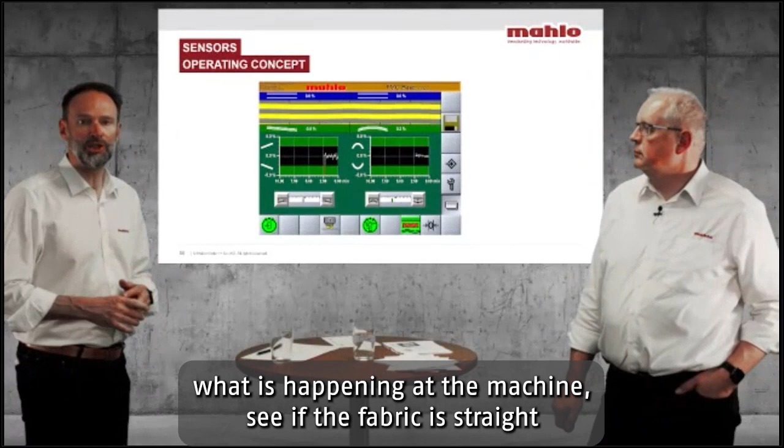And for the shift managers and the production managers, they can see already from very far what is happening at that machine. You can see if the fabric is straight and if it's running in manual or in automatic mode. So all the information is visible at a glance, which is also giving you a lot of advantages if you just pass by, because when an operator knows that he can be watched every time, he will do everything right, and he will not wait until somebody is correcting him.

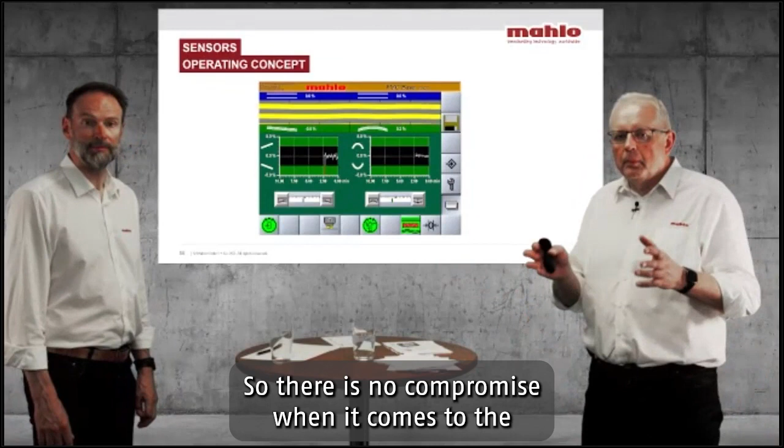Yeah, and we have different levels of software. They differ mainly in the level of comfort of operating the system. So there is no compromise when it comes to the evaluation of the signals and the control itself, but you have different possibilities how you can work and interact with the machine.

You get a little bit more information. You have some help how to set up the machine and such things. And on top, when we now combine weft straightener with process control, we also have a version where you can see everything on one screen. It's no longer necessary to jump from one page to the other page. You can see all the important parameters during a stentering process on one screen, and it's a normal screen in the cockpit, and there you have all the data available.

Talking about data management, these days Internet of Things and Industry 4.0 are very, very important, just to play with the data, to make it available, to create some transparency, optimizing processes, sharing data with other entities, perhaps also managing your dye house and your operation from another point, from a home office or wherever else.

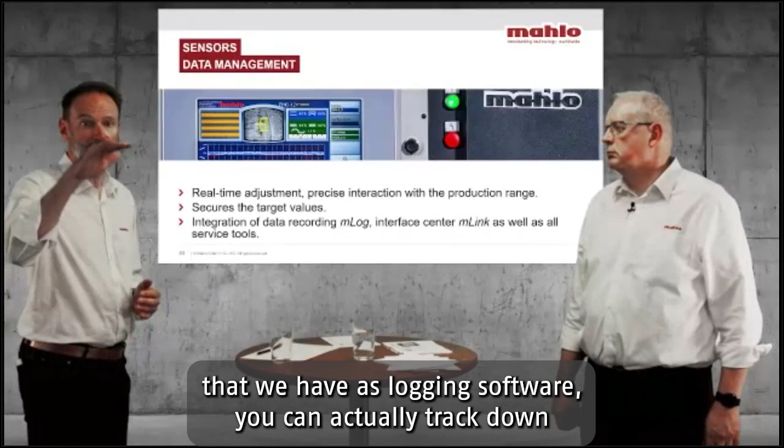And those are things that we support in every aspect with the right interfaces and adjustments and with the mLog system that we have as a logging software, where you can actually track down every centimeter of your fabric and see what has happened with it during the night shift, during the weekend. So you really have full transparency of what has happened, and you can share it with everybody who's interested. So if somebody blames you that you haven't reached the right values, you can show him exactly what has happened. So you have an insurance for everything that might happen in your production.

And as far as the interface is concerned, we have Profibus, Modbus TCP, OPC UA, everything. Just talk to us and we'll find out very soon. All the regular interfaces are there, so you just tell us what you require, and then we can provide the data externally.

What Stefan already emphasized is we are using the measured data for the online control, like what we showed before, but also we give you historical data in the form of protocols. We have developed a completely new software which is like a search engine, so the data are stored, and with this system you have the possibility to create your own protocol, however it is required from your side. You can say, I want to see the data from the full shift, I want to see the data delivered from one customer within a specific week. You can do whatever you like because all the data is available. And it's got a very nice look and feel.

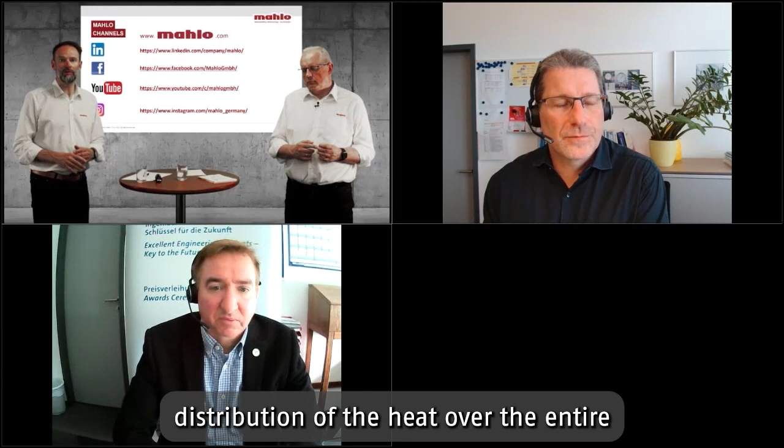Yep, this is absolutely a valid question, and it's my fault that I haven't mentioned it earlier. Of course, this is vital to see whether the drying process is really taking place over the entire width. If we are talking about 3.2 meters, the distribution of heat over the entire width is not always regular, and with that we can check it. You get a very good indication of what is happening inside your stenter, and you will realize there might be a problem before you have a fabric which is destroyed.

Yes, and the same applies to the residual moisture control. We not only have the possibility to measure the lowest moisture content, we can also indicate left, center, and right moisture content, which is sometimes important for a subsequent padding process and such things. Yeah, we have a cold pad system. Exactly. Okay.

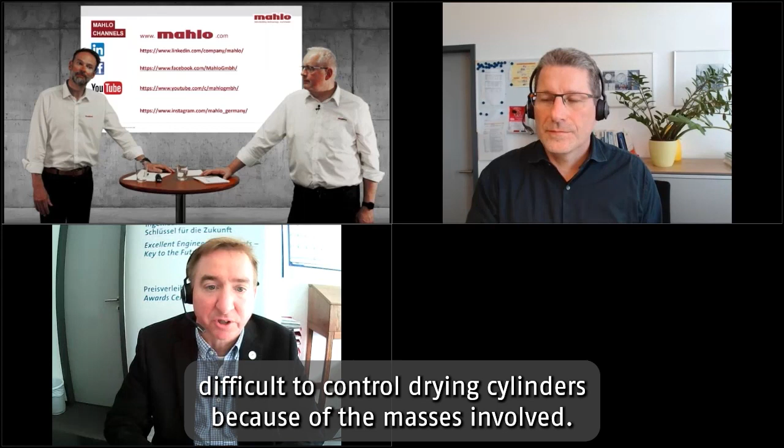Another question, this person seems to have some doubts: it seems difficult to control drying cylinders because of the masses involved. It is much more difficult than in a stenter. Does it really work? It works perfectly. I can only say we can give you reference installations, but there is one thing I have to mention.

You cannot have only one valve at the end which you control with the residual moisture sensor. You need to do what I tried to explain with the condensate temperature, and you have not only one control loop. You need to separate your cylinder dryer into individual stacks with individual proportional or on-off valves. This is necessary, and then it works perfectly.

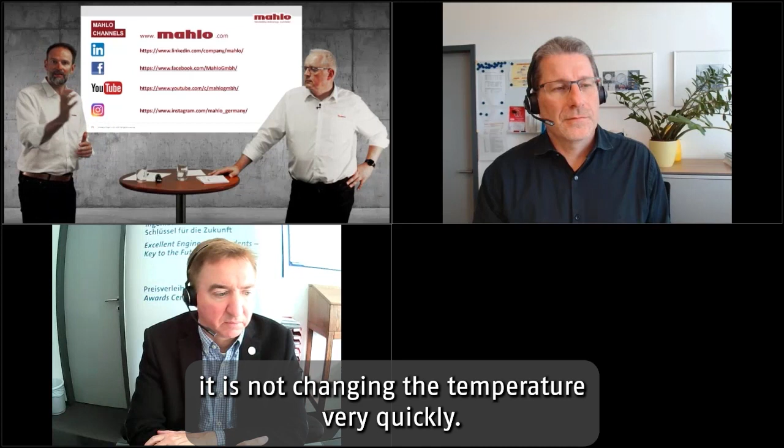As I said, we have many customers, and especially with the Atmoset SMT, we have a lot of customers who bought one, who bought two systems, and afterwards they have 10 and more systems installed. I can fully understand why somebody thinks that might be a problem with these cylinder dryers, simply because the steel or the stainless steel of those cylinders is not changing the temperature very quickly, and this is why we have taken the surplus of the condensate, because the temperature of the water can be measured, and this is an indication, and this is actually the reason why our system works.

It is because it's a Mahlo, of course, but also because we have taken that water, which is fluctuating much easier in terms of temperature than the steel frame of those cylinders. So don't be misguided by that huge installation of cylinders which are not quickly changing the temperature. We are not measuring the temperature of the cylinders, we are measuring the temperature of the condensate, of the water. And this is the reason why it's working that easily and why we can control it.

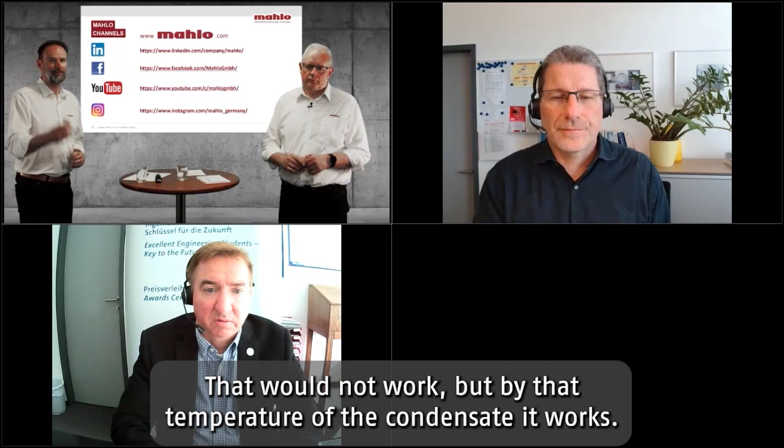We wouldn't be able to control the temperature of the cylinder or of the chrome or the stainless steel or the steel. That would not work. But by the temperature of the condensate pots, this is why it is actually all of a sudden making a very, very good system. Yes.

Okay, another question. Can you also recommend the pick density counter for an open width compactor in felt type? Basically, we have also quite a number of installations there, because in the end, it's the same inlet scenario like on the stenter frame. It's open width. You go underneath, you have the overfeed roller, you overstretch before you go there to get those things in. Yes, it's possible, but I would say that at first it should be installed on the stenter frame, because a lot of material goes over the stenter frame.

It can be equalized there already, and then it comes to the open width compacting machine already with a very equal density. And then you can utilize the open width compactor with a better efficiency and also with higher speeds.

Okay, to finalize it, I would like to quote a comment that was written here: Excellent presentation by both of you. I'm sure this session is the need of the hour. I think you've done an excellent job. Thank you. Thank you. My pleasure. Means a lot to me, to us. Yes, I think so. There was a lot of commitment and also conviction involved in your presentation, and I think you're really a good team to present all these innovations and advantages for the textile industry. Perfect. Thank you. So now we wait for ITMA to do it in the live performance. Yes. It's always better to meet in person, of course.